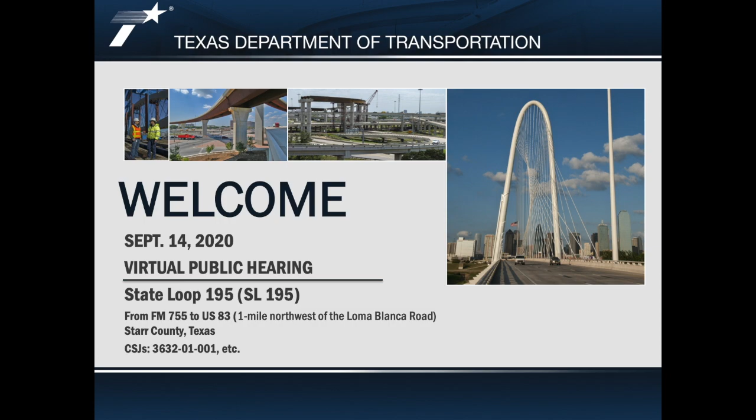Given the unique circumstance of the COVID-19 outbreak, along with our commitment to protect public health during this national emergency, TxDOT is conducting the public hearing virtually and providing an in-person option. All project information can be found on the TxDOT website, www.txdot.gov, keyword search SL195. Additionally, TxDOT is providing an in-person option for individuals who would like to participate in person instead of online. In-person attendees will be able to view the same presentation delivered in the virtual public hearing, which will be playing on the screen, review hard copies of project materials, ask questions of TxDOT staff and/or consultants from a socially distanced approach, and leave written comments.

The in-person option will be held on Tuesday, September 15, 2020, from 9 a.m. to 6 p.m. at the TxDOT Pharr District Office, 600 West Interstate 2, Pharr, Texas, 78577. And on Wednesday, September 16, 2020, from 9 a.m. to 6 p.m. at the TxDOT Roma Area Office, 2654 US 83, Roma, Texas, 78584. The same information will be presented at both locations.

Attendance at the in-person option will be by appointment only. Individuals wishing to attend the in-person option must call 956-702-6246 between the hours of 8 a.m. and 5 p.m., Monday through Friday, to make an appointment. In recognition of COVID-19, enhanced safety measures will be applied at the in-person option, including a requirement to wear a face mask, submit to a temperature check prior to entry, have an appointment, and follow social distancing practices. If anyone arrives without an appointment, they may be asked to wait outside to ensure we maintain appropriate occupancy within the hearing room. Following the virtual public hearing, the presentation will remain available for viewing at the web address indicated above until Thursday, October 1st, 2020 at 11:59 p.m.

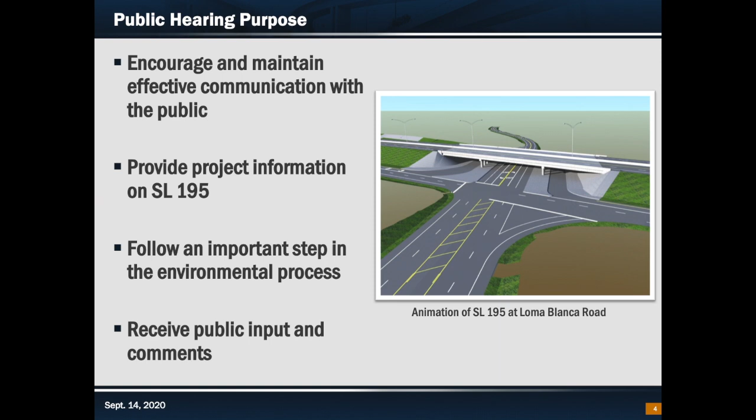Your input and comments are an important part of this process, and we encourage you to provide comments on this project. As I mentioned earlier, your continued participation throughout the planning and development of this project is very important. I encourage you to talk with your neighbors and refer them to us so they can also make comments and be included in the process.

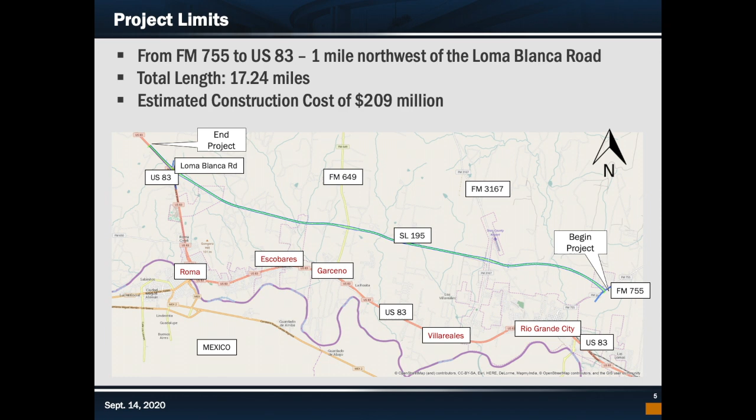This project is located in Starr County and traverses the limits of Rio Grande City, the City of Escobares, and the City of Roma. The project consists of constructing a new location 4-lane divided highway beginning at FM 755, which is 2.5 miles northeast of US 83 in Rio Grande City, and ending approximately 1 mile northwest of Loma Blanca Road along US 83. The project is approximately 17.24 miles in length, and the estimated construction cost is approximately $209 million. The map on the screen shows the general vicinity of the project.

As the population in the project area has increased, so has traffic congestion. The existing US 83 highway does not meet current demand, much less the anticipated growth and projected traffic volumes. In addition to the increased population, US 83 is the only major east-west corridor in the area, funneling motorists through Rio Grande City, Escobares, and Roma.

As a result of increased traffic on US 83, signals have been installed to facilitate traffic movements at major intersections, which in turn has resulted in reduced mobility. The signals disrupt the continuous flow of traffic, further reducing the US 83 corridor's capacity and increasing the amount of time it takes motorists to reach their destination.

In addition to improving mobility in the project area, the proposed roadway would improve the safety of the traveling public. State Loop 195, as proposed as a 4-lane divided facility, would substantially decrease the future likelihood of head-on collisions occurring for through traffic utilizing the new State Loop 195 facility. Vehicular passing would also be facilitated by the proposed design.

Large truck through traffic and hazardous material transports will be more likely to use State Loop 195 and avoid the congestion and signalized intersections along the existing US 83, increasing the safety of that facility as well.

Statewide, accident rates are statistically lower on four-lane divided facilities than on undivided facilities such as existing US 83. The existing US 83 corridor also offers poor regional connectivity, as intercity motorists must transition from a four-lane divided highway

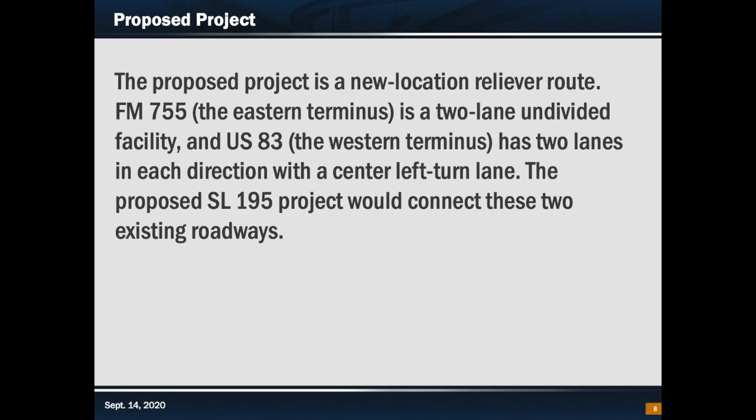The proposed project is a new location reliever route. FM 755, the eastern terminus, is a two-lane undivided facility, and US 83, the western terminus, has two lanes in each direction with a center left turn lane. The proposed SL 195 project would connect these two existing roadways.

The preliminary corridors studied were located north of the existing US 83 right-of-way in order to avoid the developed areas of Rio Grande City and Roma, as well as environmentally sensitive areas between the existing US 83 and the Rio Grande. Environmental specialists and design engineers developed and utilized an environmental matrix to narrow the preliminary route alignments.

Public meetings were conducted and environmental issues identified. After consideration of possible benefits and impacts, a preferred corridor was chosen, and numerous alignment alternatives within that corridor were evaluated. In order to minimize impacts to the human and natural environment and address previous public comments, an additional corridor was crafted from portions of the preliminary corridors.

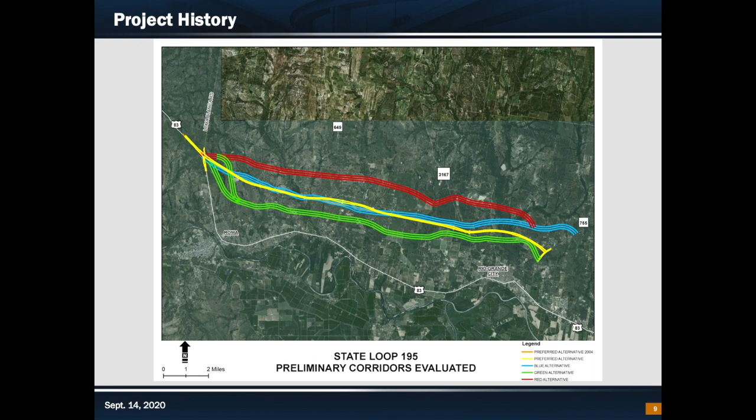For example, the recommended alternative corridor would avoid impacts to the floodplain of Olmitos Creek, while the blue and green alternative corridors would impact the floodplain. Next, a number of alignments were evaluated within the recommended corridor, with a refined alignment being carried forward as the preferred alternative. This alignment is shown in yellow.

The scope of the project in 2000 consisted of a controlled access facility without frontage roads. TxDOT conducted the first public meeting for this project on February 2, 2000 at the Roma Community Center in Roma, Texas. TxDOT then held a series of open house workshops in Rio Grande City and the City of Roma in December 2004. The project was temporarily put on hold due to funding constraints in 2008, but stakeholder meetings with local

elected officials were resumed in November 2012. Two public meetings were held in Roma and Rio Grande City in 2017. Throughout project development and public comment, the scope of the project evolved into a four-lane divided rural highway. The proposed right-of-way width has remained 300 feet wide.

The following slides will include a discussion of the proposed recommended alternative. Full versions of the public hearing display maps are available for download at www.txdot.gov. Search for SL195. The proposed construction on State Loop 195 would consist of the following: constructing a new location

relief route with a four-lane divided highway facility within a 300-foot right-of-way. The proposed right-of-way increases to 450 feet at the intersections where future overpasses would be constructed. These intersections would include FM 3167, FM 649, and Loma Blanca Road.

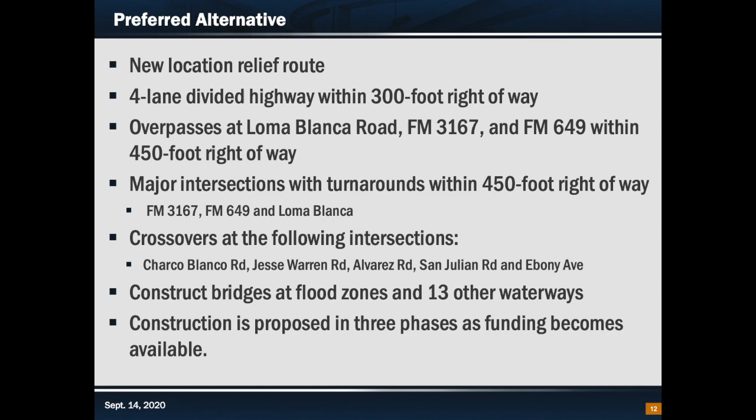The new roadway's typical section would have two 12-foot wide travel lanes in each direction and a grassy median. The roadway will expand to include left turn lanes at the at-grade intersections with existing roadways and at the turnaround locations provided along the alignment. The roadway would have 4-foot inside shoulders and 10-foot outside shoulders within a typical 300-foot wide right-of-way.

There will be an overpass approach at the intersection with US 83 Loma Blanca Road. The proposed project would also include improvements to FM 3167 and FM 649. At these locations, the cross streets will be widened to provide a travel lane and left turn lane in each direction for a length of 285 feet within the intersection.

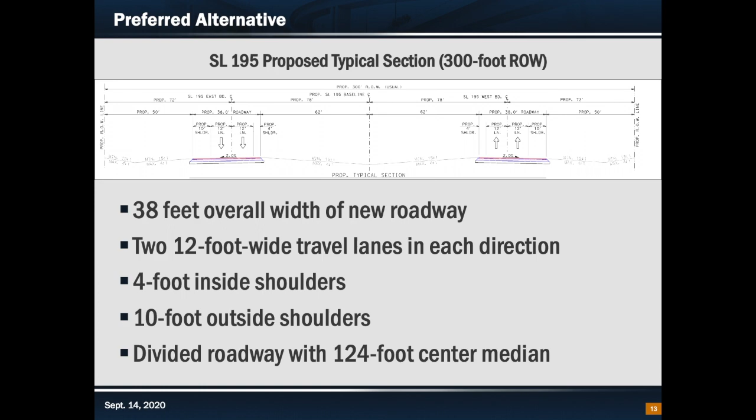Drainage will be accomplished by a series of roadside ditches that will carry runoff from the proposed project to the nearby arroyos following the natural contours of the land. Culverts or bridges will be adequately sized and constructed to carry the design year flow without overtopping the proposed roadways.

This slide is showing the proposed State Loop 195 typical section within a 300-foot right-of-way.

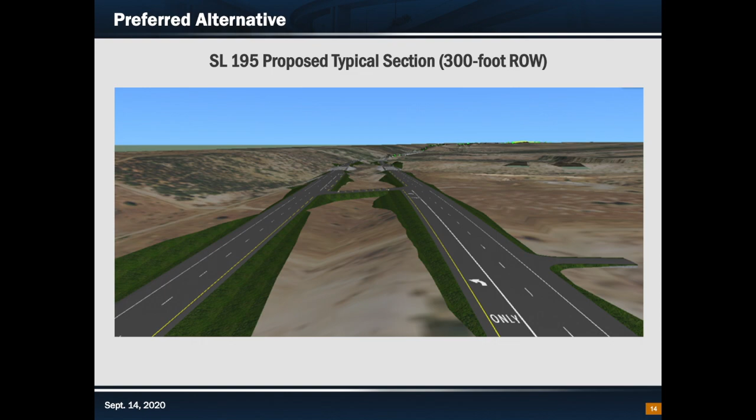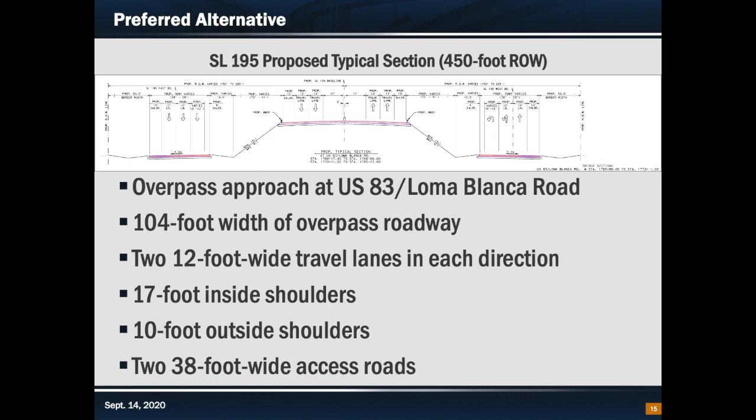In the areas with future overpasses, the right-of-way would be increased to 450 feet wide to accommodate future main lanes over the intersection. The overpass approach at US 83 Loma Blanca Road would have two 12-foot vehicle travel lanes in each direction with 17-foot inside shoulders and 10-foot outside shoulders.

This is the proposed State Loop 195 overpass at Loma Blanca Road within a 450-foot right-of-way.

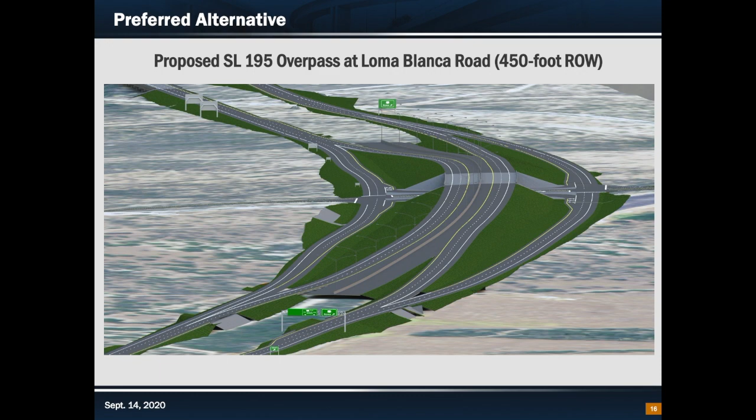The environmental review, consultation, and other actions required by applicable federal environmental laws for this project are being or have been carried out by TxDOT pursuant to 23 U.S.C. 327 in a Memorandum of Understanding dated December 9, 2019 and executed by FHWA and TxDOT.

Since the proposed project uses state and federal funds, it is required to adhere to the National Environmental Policy Act, otherwise known as NEPA. NEPA requires an analysis of environmental impacts to the human and natural environment as a result of the proposed project. As part of the environmental process, technical analyses were completed to document the environmental impacts of the proposed project, including biological resources and rare plant surveys, water resources, cultural resources including historical and archaeological resources, hazardous materials, traffic noise, community impacts, air quality, and indirect and cumulative impacts.

Potential impacts to environmental resources are summarized on the following slides. A draft environmental assessment document, also known as an EA, was prepared which summarizes all of the aforementioned technical analysis. All environmental documentation has been developed in accordance with NEPA, TxDOT, and FHWA standards. The technical reports and draft EA are available for download on the TxDOT website.

www.txdot.gov, keyword search SL195. The proposed project would require approximately 667.01 acres of proposed right-of-way. No easements are anticipated. A 10-foot outside shoulder would be provided on both sides of the roadway for bicycle accommodations.

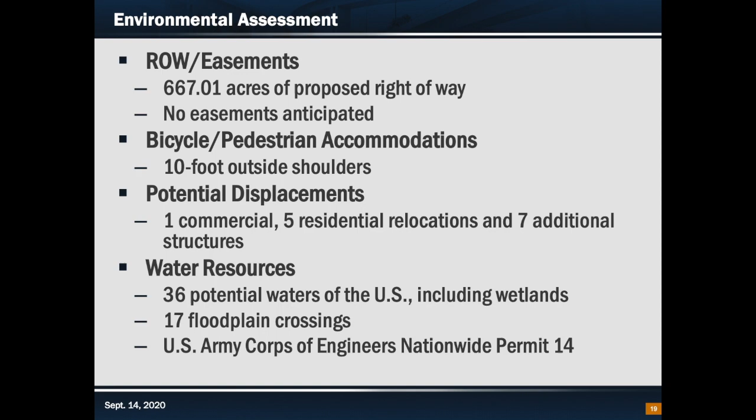The construction of SL-195 would not only relieve through traffic congestion along US 83 in the region, but would also improve access for local residents in the immediate project area. The proposed project would increase connectivity of the surrounding area with area schools, facilities, and essential services. No disproportionately high and adverse impacts on minority or low-income populations are anticipated.

A Tier 1 site assessment was completed for the proposed project to determine whether coordination with the Texas Parks and Wildlife Department will be required. Impacts to vegetation of the agriculture, disturbed prairie, floodplain, riparian and scrub, thorn scrub, and shrubland habitat types would exceed the threshold for coordination with Parks and Wildlife, though impacts to vegetation proposed by the build alternative would be minimized to the greatest extent practicable.

Some wildlife species could occur within undeveloped portions of the existing and proposed right-of-way. Required clearing or other construction-related activities may directly or indirectly affect species that reside on or adjacent to the project area right-of-way.

Heavy machinery could kill small, low-mobility animals or could cause soil compaction, impacting animals that live underground. Larger, more mobile species will typically avoid construction activities and move into adjacent areas.

Coordination with TPWD was initiated on November 5, 2018 and completed on March 22, 2019. A number of threatened and endangered species have the potential to occur within the SL-195 project area. Targeted plant and animal habitat surveys, including presence-absence surveys, were completed during project development. Both the federally listed plant Zapata bladderpod and the state-listed plant Johnston's frankenia were observed within the alignment during surveys.

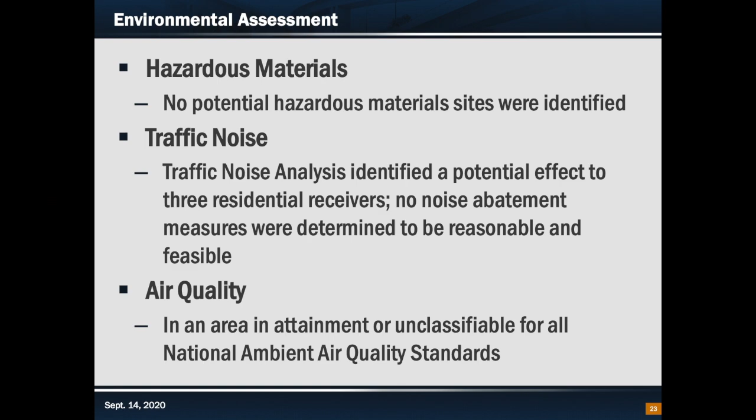Noise abatement measures were considered and analyzed for each impacted location. Before any abatement measure can be proposed for the project, it must be both feasible and reasonable. None of the noise abatement measures will be both feasible and reasonable. Therefore, no abatement measures are proposed for this project.

Throughout the project development process, TxDOT has coordinated with the following agencies: Texas Commission on Environmental Quality, Texas Historical Commission, State Historic Preservation Officer, Texas Parks and Wildlife Department, tribal entities, U.S. Army Corps of Engineers, and U.S. Fish and Wildlife Service. Property acquisitions will follow federal and state laws and policies.

The Uniform Relocation Assistance and Real Property Acquisition Policies Act of 1970, also known as the Uniform Act, is a federal law that is followed for appraisals, negotiations, and relocation of families or businesses. Right-of-way brochures are available on the TxDOT website. Titles 2 and 3 of the Uniform Act discuss the rights of property owners.

Independent fee appraisers will appraise each individual property needed as additional right-of-way. Each affected property owner will receive a certified letter from the appraiser requesting a meeting with them in order to inspect the property and provide them the opportunity to accompany them to perform a pre-appraisal inspection. They will also request permission to enter a property for inspection of improvements. The appraiser will determine the land value, improvement value, and damages to the remainder, if any, of the property to be acquired. With the initial offer, an appraisal will be provided.

This will be forwarded to the landowner by certified return receipt requested mail as dictated by state law.

The project currently has available money for construction and right-of-way acquisition. The acquiring agency will start the acquisition process once the environmental clearance is obtained.